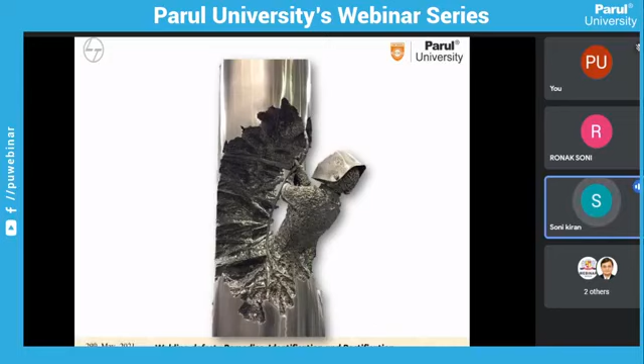There will be multiple images shown. It's okay if you haven't been able to see all the images, but these images were nothing but the creativity of welding. All the images had welding in common, and from the basic welding processes, all the creativity will be there. So it's all about imagineering. Now I'm going to share with you the imagineering, or I can say the creativity, of L&T.

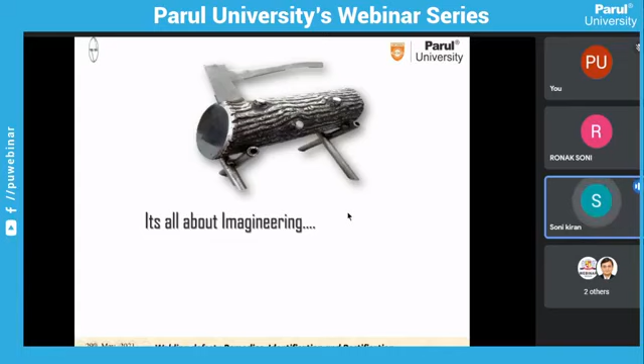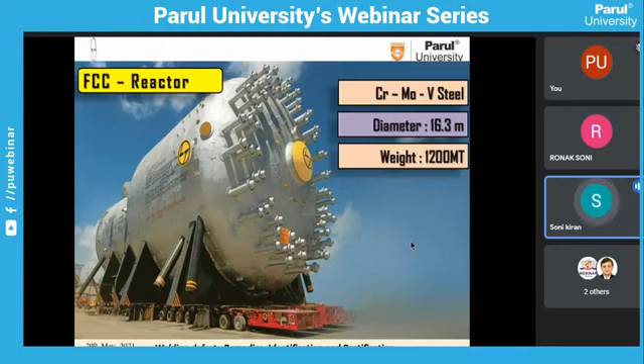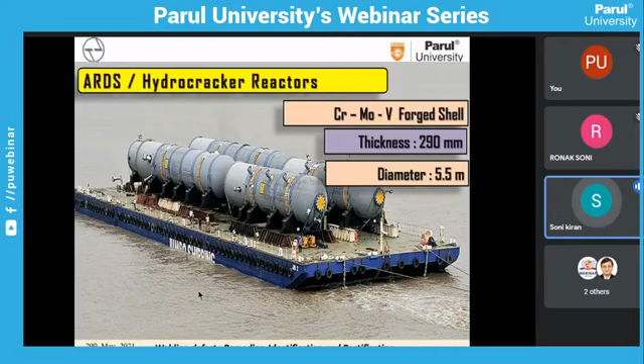Ronak, can you please move to the next slide? Just look at the creativity - the variety of material, the diameters, and the weight of what we manufacture here as equipment. Go to the next slide. Now you can see the glimpse of some images of equipment manufactured at L&T. If you look at these equipments, they are the largest, longest, biggest - superlatives in nature. So I can say, just imagine the superlative - we have actually built that superlative. This is what L&T engineering is all about.

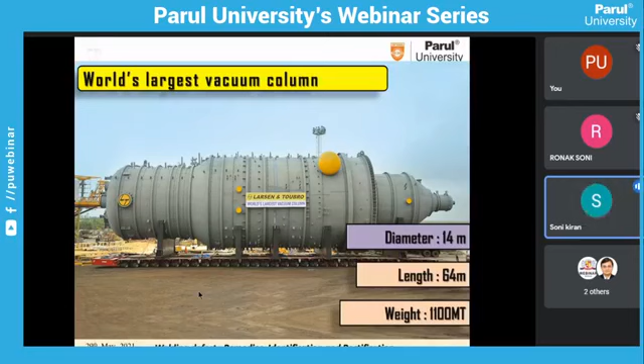Ronak, go to the next slide. You can see the glimpse of some products and the capability of L&T. This is one of the biggest, largest vacuum columns. Next slide please - you can see all the superlatives.

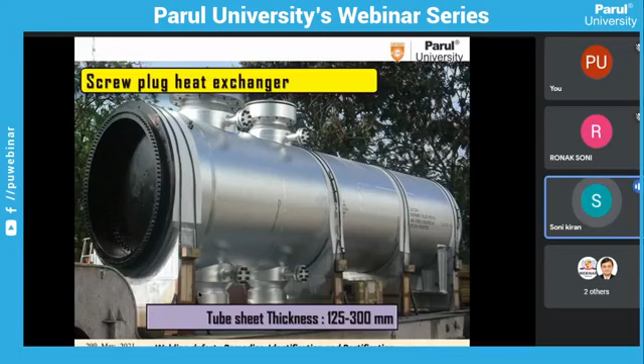The idea behind this slide is not to brand my company or L&T, but the idea is that all these equipment are not just creativity, but are also critical in nature. If there is any issue with this equipment while in service, it may cause harm to thousands of lives. From when we procure the plate material as raw material to dispatch, and when it is in service, we need to maintain the quality, or the integrity, of the material - otherwise, rather than creativity, it will damage or destroy the whole thing.

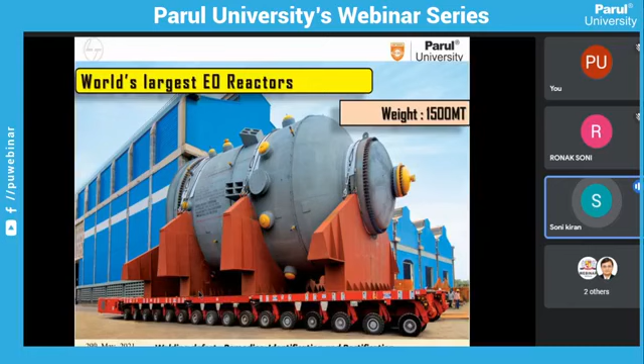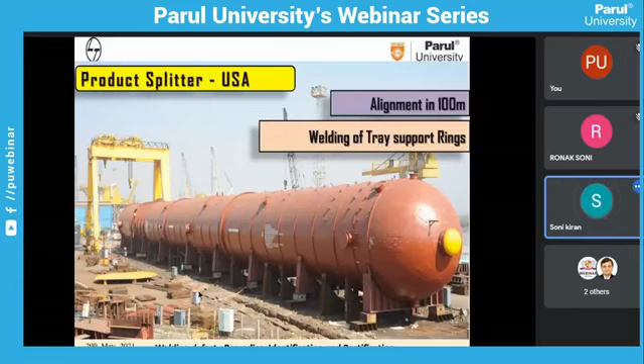Just to explain that, I have covered a few incidents in the next slides. Ronak, you can change the slide. Next slide please. These are all equipment, just to help you visualize their size and how critical they are. Next slide please.

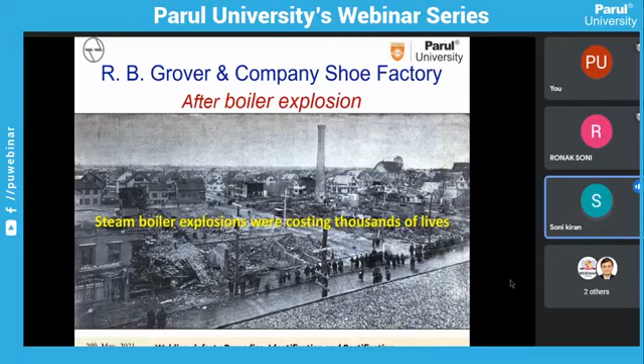So the most importance is to avoid any defect. Second, if any defect is there, we need to detect that defect. And once we detect that defect, we need to rectify it. After completion of all this cycle, the final product should be of good quality.

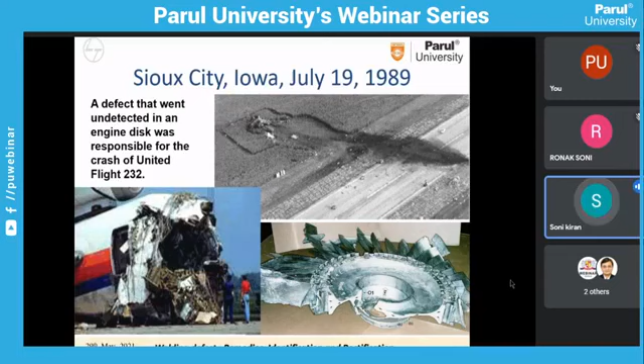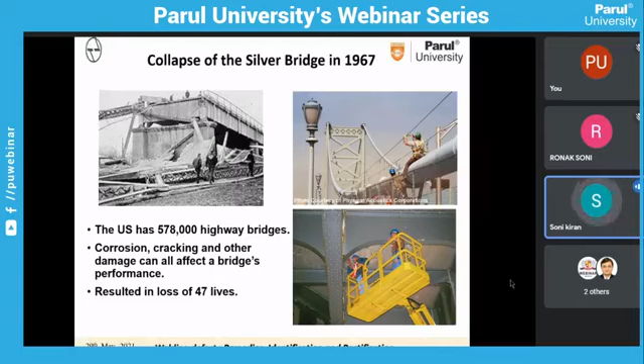Next slide please. Like it is everywhere. So as I said, we need to first avoid defect. At L&T, we have set our target like Airtel, zero defect in weld. Right now we are at 0.07% defect of the meter weld that we have welded, but we are targeting zero weld defect. Then the second stage is we need to detect that defect, and the third stage, once the defect is identified, we have to repair it, rectify it.

In a nutshell, if any customer comes to us, first of all we need to give an assurance that if we weld any product, it will be defect free. So we have to give him that assurance. Once we receive the order, we need to ensure that our product is defect free. If there is any defect, we need to rectify it. But finally, the product should be defect free.

It is not like the image you can say of the ghadi - ghadi is like 'use it first, then trust it' - but it is not like that when the matter comes to safety. It is the reverse. Next slide please.

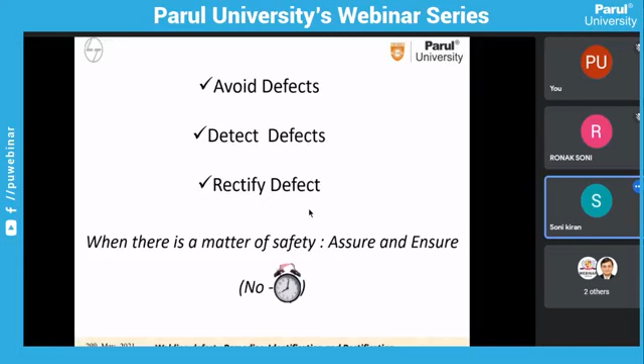Defect can be identified at various stages, like the raw material stage - if the material has an inherent defect, the fabricator cannot do anything. So first of all, defect needs to be identified at the raw material stage.

Then it comes to the fabricators like L&T, where we manufacture the product, and any defect in welding we need to identify. Once the product is delivered and during service, it is a requirement to identify defects in service also. These are all the various stages, and at all stages we need to identify that defect. Next slide please.

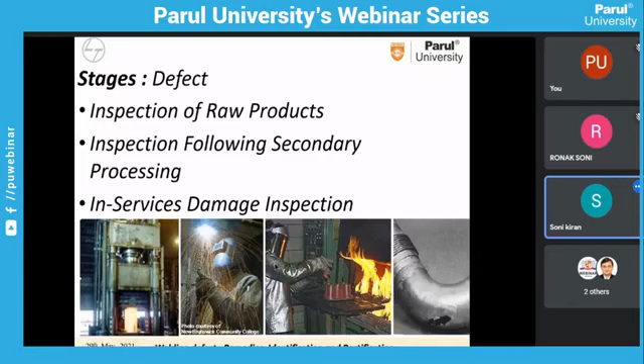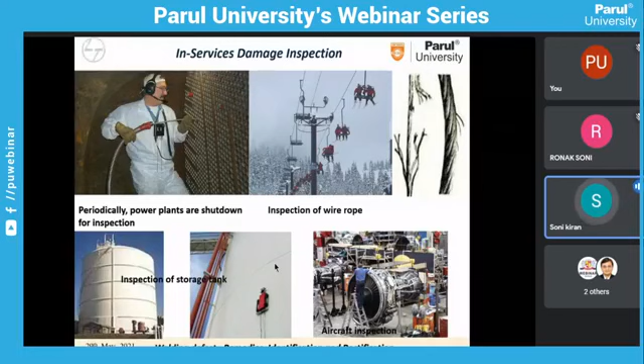Like this, in service, few examinations like we need to examine aircraft or pressure vessels. Normally refineries take a shutdown to identify the defect. This is a typical pressure vessel and heat exchanger - during welding, during fabrication, and in service, they are inspecting through various methodologies, like radiographic examination, which I'm going to cover in subsequent slides. Next slide please.

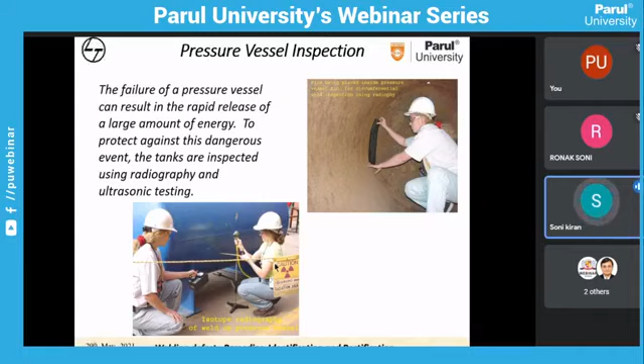So till now, I frequently used the word defect, defect, defect. But can anyone share with me what you mean by defect? If anyone would like to share their view on the word defect, what do you mean by defect?

Okay, I will explain. Please go to the next slide. We have various joining processes available with us, like bolting, riveting, adhesive bonding, brazing, soldering, and the last one is fusion, that is welding, where we actually do the metallurgical bonding of similar or dissimilar base materials. But among all the joining processes, in fabrication we use welding, that is the fusion process.

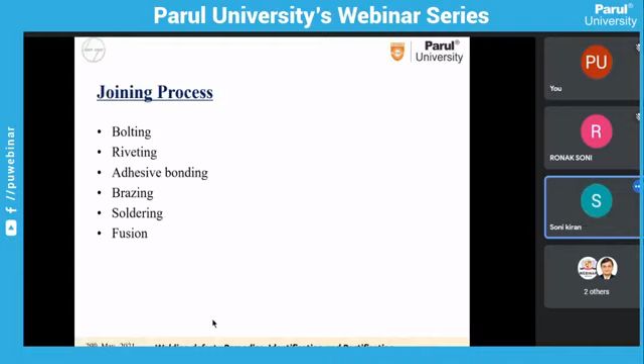Why? Because it gives us - here we can see the definition of welding. It's the typical joining process where we apply heat or pressure, with filler metal or without filler metal we can weld. But the key term in the last line is homogeneous. Among all the joining processes, only the fusion joining, if we consider this as a joint, is homogeneous.

It means the property of base material and the property of weld material, after joining, is almost matching or superior. The required property in terms of mechanical or corrosive property, the joining material and the complete joint is homogeneous, meaning uniform.

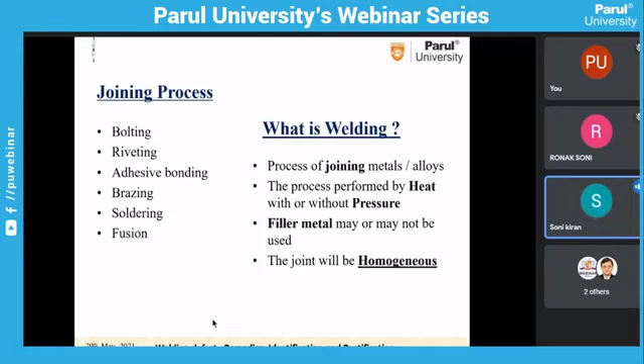If we disturb any homogeneity or uniformity of that joint, then it is considered as a discontinuity.

Discontinuity, if I want to explain in a better manner, let's say you go to get your new bought car, and today is your delivery. So what you do is when you go to the showroom and receive that car, you check all the points to see whether any defect is there or not.

You identify 10 to 12 points that are not meeting the requirement, like the steering cover where the thread is torn out. There is some observation in the car, but it will not affect the performance. But at the same time, if you look at the steering and it is loose or has some vibration, it will affect the safety or performance of the car.

So you have multiple points of observation, or in other words, discontinuities. Those discontinuities might affect your performance or might not. So I can say the acceptable observations are discontinuities. All discontinuities can be accepted or rejected.

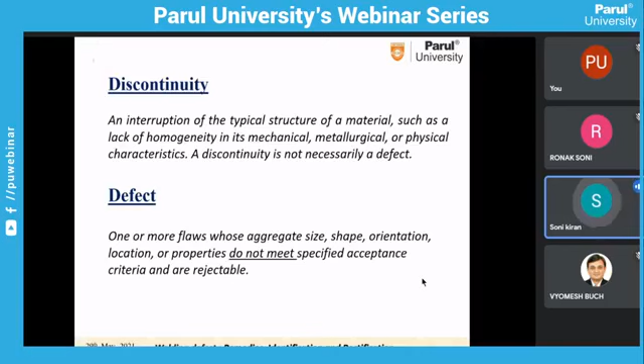So there is no need to rectify all the discontinuities. Only defects need to be rectified. All the rest of the discontinuities can be accepted because they are not defects. So there is a basic difference.

With this phenomenon, industry works with codes and standards by which we manufacture the product. So the basic idea is that you're not required to repair everything — you only need to repair and identify defects. These are the various defects. I will not cover all of them, but the basic defects that I'm going to cover, because covering all would take too much time.

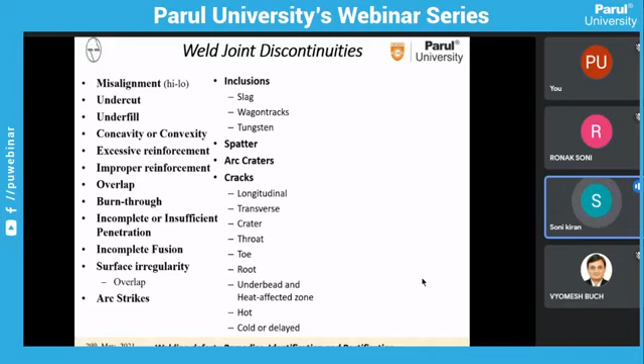There are many defects at various stages, but the majority at our fabrication level are like undercut, porosity, and burn through. I'm going to cover them one by one.

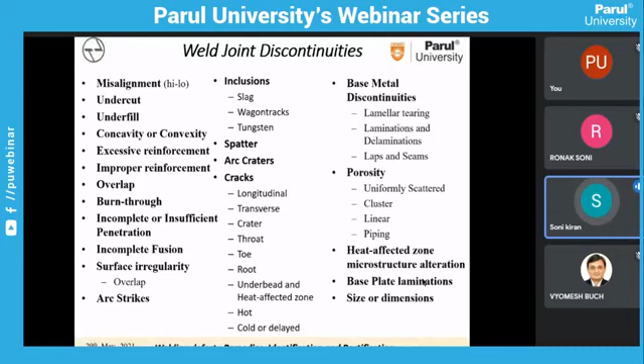A very common one, and people often say 'welding mein crack aa gaya' — the crack is a very common defect. I covered earlier why this crack occurs. There are a number of possibilities because of which cracking happens after welding.

First is the wrong consumable. If I use the wrong consumable, the weld will not match the chemistry of the base material, so it will get cracked.

There are other causes too, like not following the procedure. Normally the welding engineer gives welding procedures specifying the ampere, voltage, speed, consumable, and preheating of the job. If that technique is not followed, it may result in cracking. So we need to follow the procedure and use the correct filler wire to avoid cracking.

One more cause is improper preheating. It is required to do preheating of 150 degrees Celsius prior to welding. If I don't do that preheating, the cooling rate of the weld metal will be faster. If I do the preheat, it results in a slower cooling rate.

But if I do not do the preheating, the cooling rate of the weldment will be on the higher side, so the weld cools comparatively faster and becomes harder. Once it becomes hardened, it's prone to cracking. So because of that, the crack appears.

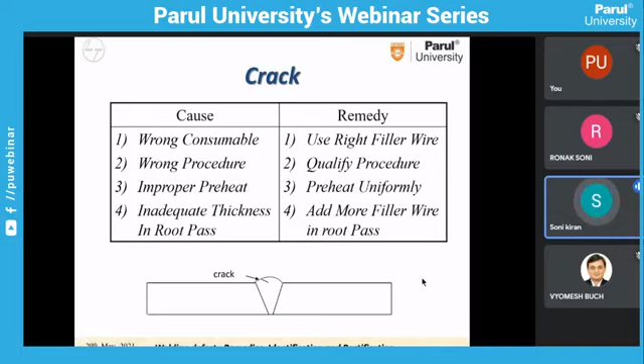Here's the image where once the weld is completed, in the heat affected zone, HAZ as we used to call it, there the crack is. It's not a visual defect. You cannot identify it by visual inspection, but there are many tools to identify that, which I'm going to cover in the subsequent slides.

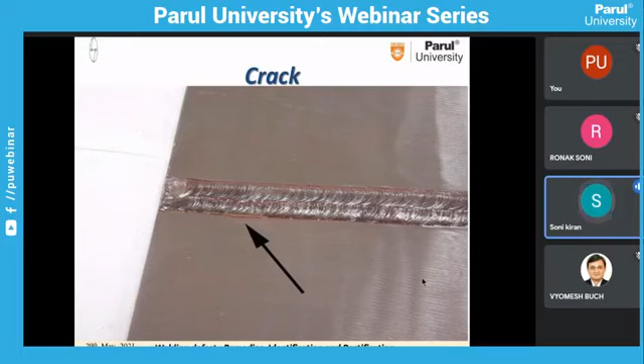Second is lack of fusion. Welding is a fusion process, and if we are not doing proper fusion, like if I'm welding with an electrode and that weld metal is not getting fused with the base metal, then it is called lack of fusion.

If the fusion is not there, it is called lack of homogeneity. So the joint is not homogeneous, and any code or any customer will not allow any lack of fusion in the joint. Our joint must be fused, weld metal and base metal must be fused, and joints must be homogeneous. So this lack of fusion has to be avoided.

There are many causes for lack of fusion. First is low ampere. A certain amount of heat is required to melt the base metal and weld metal. If the ampere is not adequate current, then it will not get fused with each other. Second thing is the electrode angle or torch angle.

If I'm not able to direct the torch or electrode in a proper manner, the edge will remain unfused. So we have to manipulate the electrode, or we can say weave the electrode properly, so that adequate weaving is there and it gets fused with each other, base metal and weld metal.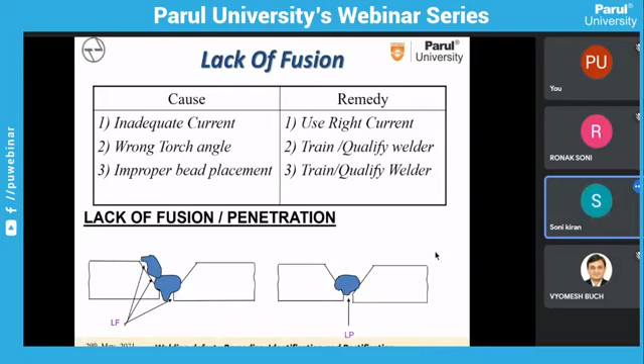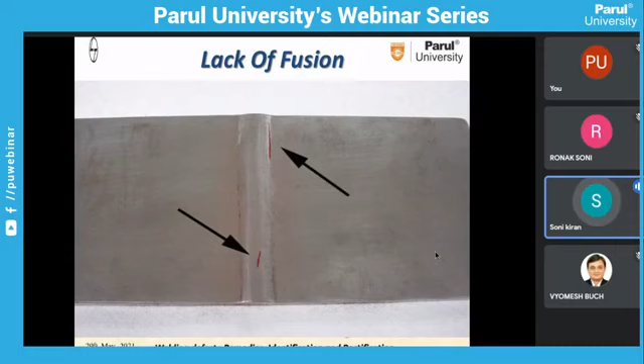This is some example of lack of fusion, like the weld bead is there, but it is not fused with the edge. These images are all from some NDT methods. You cannot see it visually, but to identify the defect there are some NDT techniques, non-destructive examination, that we will share later on.

This is porosity. Porosity is a very common defect which damages the homogeneity. Once the weld is in progress, if there is any air draft or the electrodes are in a damp condition, it will generate vapor or may damage the shielding of the arc. So that gas gets entrapped in the weld metal, resulting in porosity, and once porosity is there, the joint is not integral, and for that it has to be removed.

So the causes are improper shielding gas - like my shielding gas is proper but my torch is leaking - or my filler wire is defective, like the electrode itself having a porous material, so it will not result in a defect-free weld. So the electrode's own condition matters.

One more thing - when you weld on carbon steel that itself has rust, iron oxide, Fe2O3, if we directly weld on a rusted base metal, the iron and oxygen dissociate, and oxygen will entrap into the weld metal and create porosity. So we need to clean the base material frequently, mainly just prior to depositing the weld bead.

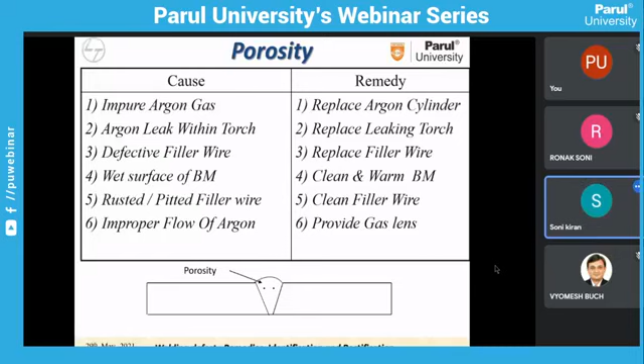One more defect is slag. So let's see this image of the SMAW process. Here in SMAW, there is a typical electrode with a bare wire covered with flux coating. That flux serves two purposes: it stabilizes the arc and prevents contamination of the arc from the atmosphere.

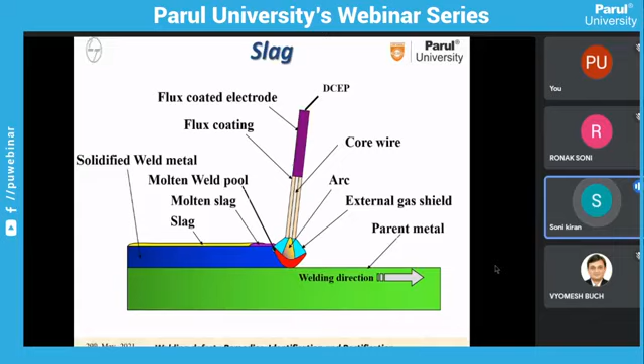In the SMAW process, the weld metal is deposited, and above that the flux converts into slag, because it is not weld metal. That slag needs to be removed. If we do not remove the slag before depositing the second pass, that slag will entrap, and since it is not a metallic material, it damages the homogeneity, so it is considered a defect. The cause is first inadequate cleaning.

The second cause is the current or angle. If we are not in a proper angle, it also results in entrapment of the slag. So the remedy is we first need to clean the weld metal prior to deposition of the second layer, and sensitize the welders so they can deposit good quality weld. These are the remedies.

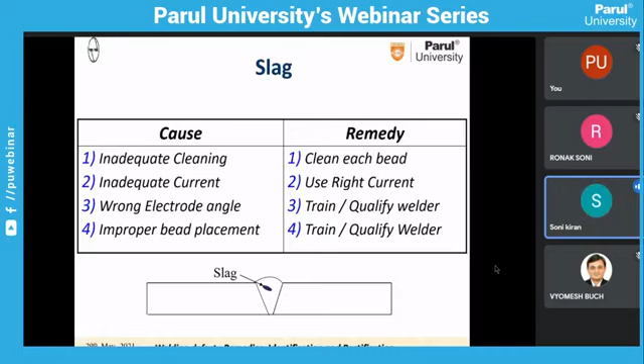Undercut is nothing but, if we weld with higher current, it fuses with the base metal because of the higher ampere, but it can also damage the surface of the base metal at the toe of the weld, cutting the base metal. Once it cuts the base metal, the total thickness of that section is reduced. Like if my base metal is 10 mm and my undercut is 1 mm, then my resultant joint thickness is 9 mm. So it actually reduces the design thickness.

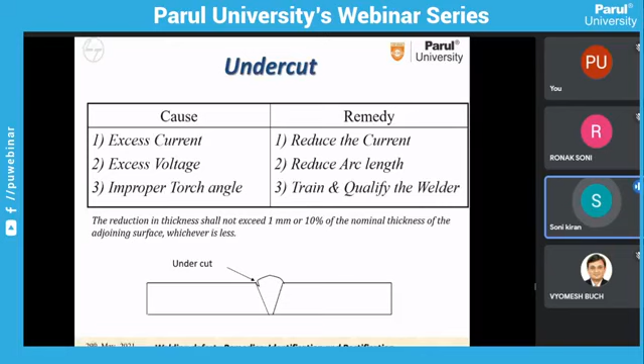That's why this undercut is not permitted. Small undercut will always be there because of welding, but excessive undercut is not allowed. There is some criteria, like 1 mm or 10% of nominal thickness is allowed, whichever is minimum, but more than that is not allowed. So that is the discontinuity and defect boundary line. The cause is excessive current or voltage, and we need to prevent it by lowering the ampere.

Next is lack of penetration. The penetration is actually at the root side, and since the process is fusion, we have to fuse the base metal from top to root, the complete thickness has to be fused. If any fusion is not there, it is called lack of fusion. But if the same lack of fusion is at the root, if you see the image, at the root the edges are not fused.

So in other words, it is called root not fused, or penetration not there. That is called lack of penetration, and lack of penetration is not allowed because complete fusion is not there. There are many reasons, but the main reason is the welder does not have a sufficient root gap. The gap is not sufficient between the two plates, so he is unable to deposit the weld up to the root. The second thing is the root face.

The root face is so high that the energy is not sufficient to penetrate the base material. So these two are the basic reasons, or one more thing is about the direction of the arc. If the arc direction is not proper, he cannot deposit till the root. So the main idea is the welder has to reach up to the root and fuse that root line. If it is not done, then it is lack of penetration.

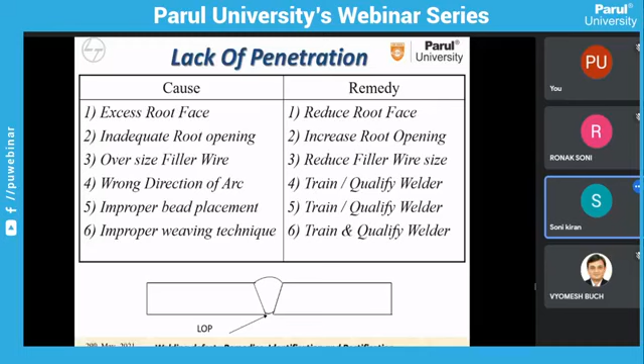Here the welder's skill has to be upgraded, along with proper joint configuration, by which we can avoid this defect.

Next is excess penetration, which is opposite of lack of penetration. Here, because of a higher root gap, the weld metal deposited by the welder actually penetrates excessively on the root side. This is actually a defect, but it can be avoided. If excess penetration is there, we can grind it from the back side, so this defect can be corrected.

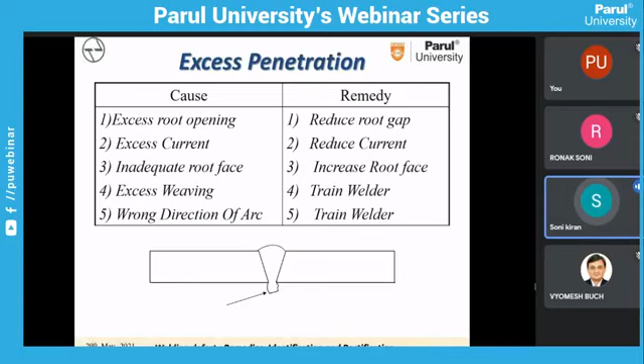But this is not possible every time. Like if my pipe is 1 inch and I find excess penetration in the joint, grinding that joint from the root side is not feasible because of accessibility. At that time, excess penetration is considered a defect. If you are able to grind it, then it is not considered a defect.

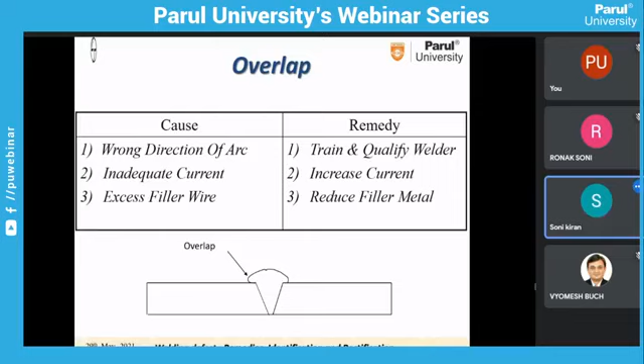Overlap, or another word, is fold. Weld metal is there, but once you deposit a weld metal, that weld metal actually overlaps on the base metal more. That creates a sharp edge at the toe, and that is considered a defect because it creates stress risers. Once it acts as a stress riser, the possibility of defect formation from the toe is very high. So that's why it is called a defect.

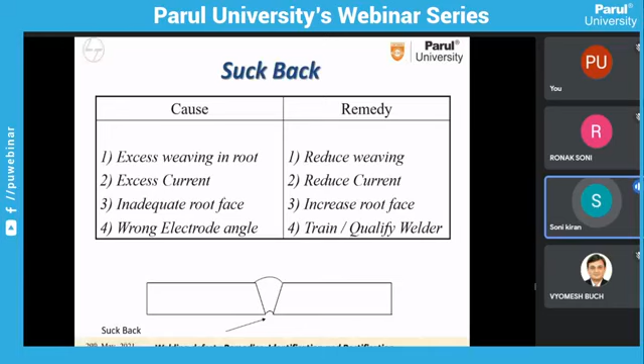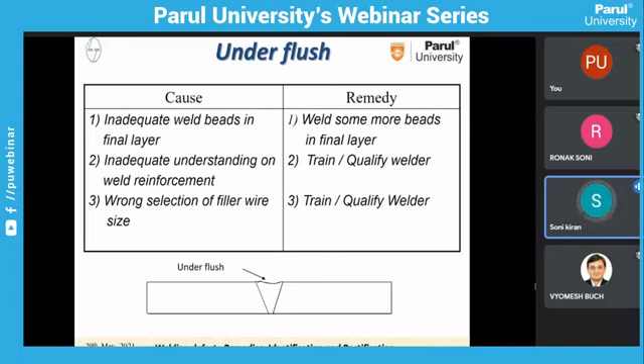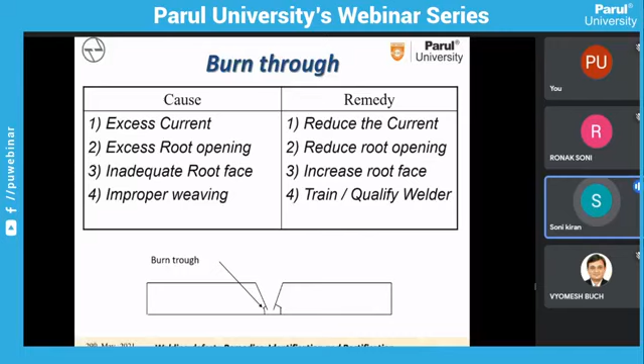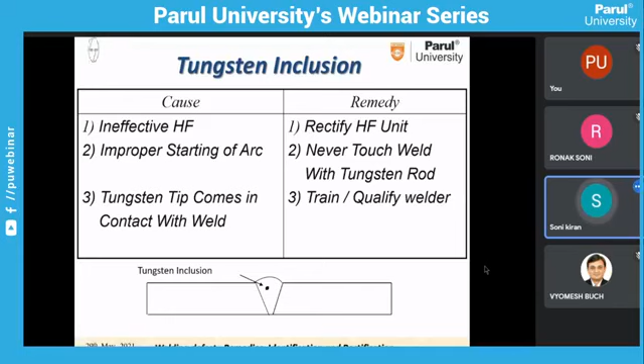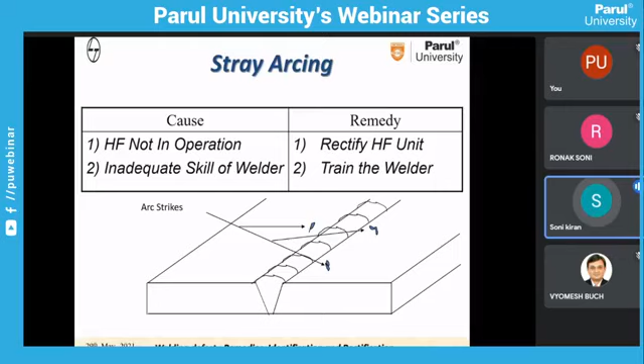The second issue is stray arcing and spatter. When we weld, there are a number of spatters. Instead of the weld depositing in the groove, some weld particles, because of excessive current, deposit on the base metal, which creates an aesthetic issue. The spatter needs to be removed, and it also damages the metallurgical properties, so this needs to be avoided.

For fillet joints specifically, there are a few terminologies, like concavity. If we require a certain fillet size and over-deposit the weld metal, then it is called convexity.

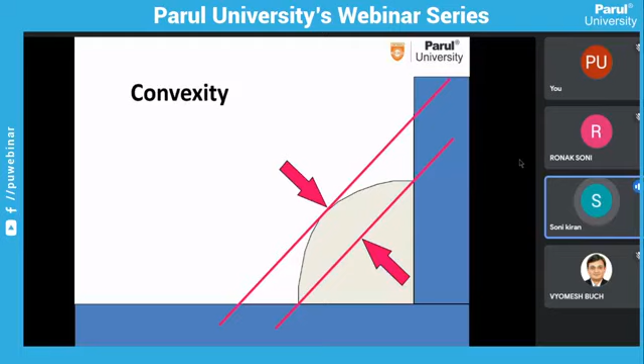If we deposit lesser weld metal, meaning the leg length is met but the throat is less, then it is called concavity. Ideally it should be a perfect triangle to achieve the desired throat, but these are two defects we can find in a fillet weld: concavity and convexity.

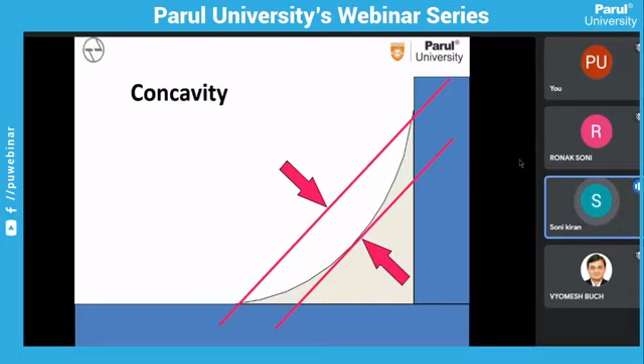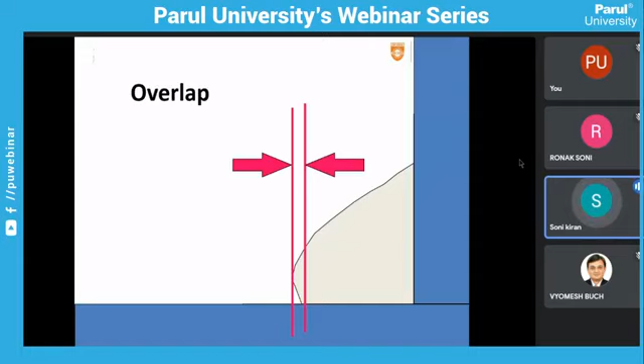Next, in a fillet weld, because of gravity, if I weld the horizontal plane of the base metal, the weld metal flows and overlaps on the base material. This is similar to overlap in a butt joint, but it creates a stress riser point.

So these are all defects, but why are they defects? Because they are unacceptable. Acceptable limits are given in some codes, standard guidelines like lack of fusion or crack, which are totally not allowed. This is for the radiography requirement - for example, up to 6 mm length discontinuity is allowed for 19 mm thickness. If my discontinuity is 7 mm, then it is considered a defect.

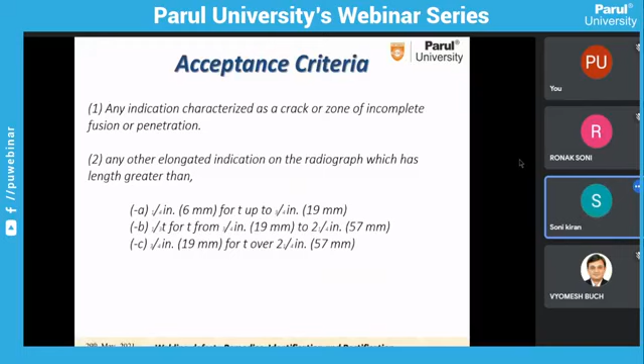So it depends on the thickness. For up to 57 mm thickness, 19 mm discontinuity is allowed as maximum, and above 57 mm, more than 19 mm is not allowed. These are the general acceptance criteria.

Now our second stage is to detect the defect. First we identify how to avoid it, but due to the manufacturing process you will face many defects. Now we have to identify whether a defect is there or not. So the very first tool to identify the defect is non-destructive examination - without damaging the job, we have to inspect it. If we want to damage the job to identify a defect, that is not a solution, because finally we need to produce the product; we cannot damage it. So we need to inspect the product without damaging it.

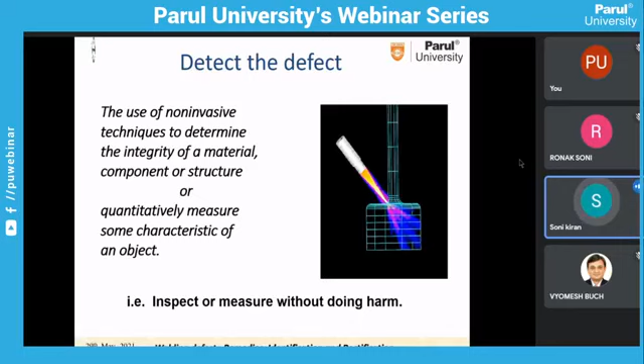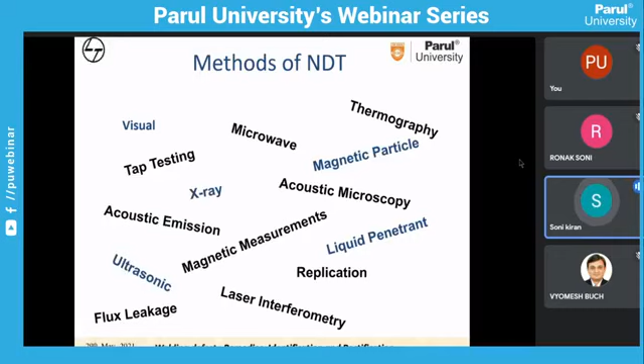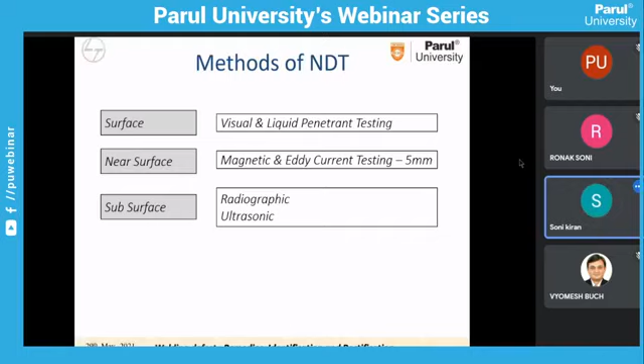The examination we use is non-destructive examination, and the very first one is visual. Many techniques are there, but visual is first. The welder or supervisor has to see the joint visually. Few defects which are open to the surface can be seen visually, and few defects which are subsurface, near the surface, can also be identified. But we cannot see subsurface defects visually because the job is not transparent. So for that we have to do NDE like radiography and ultrasonic. I will share one slide for each NDE technique.

The very first technique is liquid penetrant. If my defect is not visible to me, but the defect is already there, I am not able to see it visually.

The next step is to remove that dye and apply one more chemical which comes in white color, called the developer.

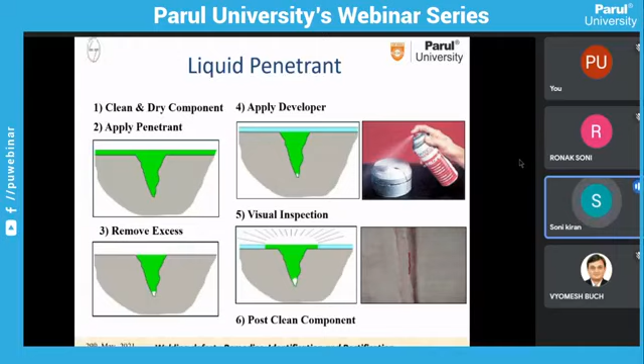So this is liquid penetrant testing, very commonly used in industries.

Second is open to surface or subsurface defect. To identify that, there is one technique called magnetic particle test. Here we use a magnet, the principle of magnetism, so the material must be magnetic. For that, carbon steel or low alloy steel can be used, but stainless steel cannot use this technique.

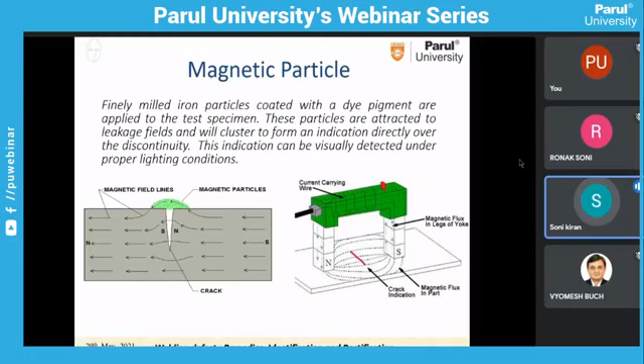If the defect is not open to surface or subsurface, we have to do volumetric examination. Like in general medical terms, we do X-rays of the chest and other parts, in the same manner we can do X-ray, or in more technical terms, radiography, of the particular product. The principle is the same as medical language, but here the kilovolt energy is higher than that required for humans.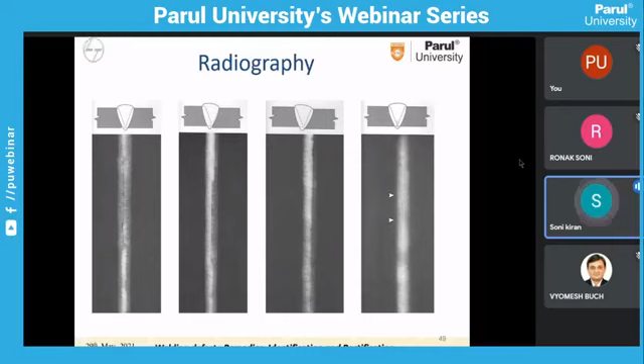If we apply a current, that transducer generates vibrations, or we can say it generates the ultrasounds. That ultrasound we have to pass through the base material.

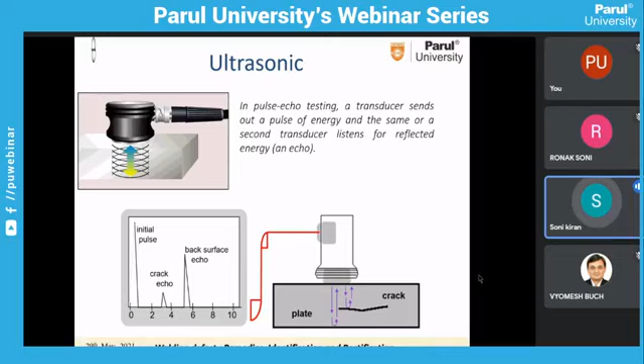This is how we can identify the depth of the defect, and by the skill of the operator, he can also judge the morphology of the defect, whether it's cracks or slag. He can identify the indication along with the depth.

So for all defects, first of all we have to avoid defects. Second, we need to detect the defect. Once we have detected the defect, the last option is to rectify it. So to generate a quality, defect-free product, there are certain standard practices we have to follow.

First of all, for any defect, in L&T we used to make a procedure, and that procedure we give to the operator on how to rectify the defect. The standard procedure is like this: here a horizontal seam is there, and in the center there is a defect that we have identified.

Now with radiograph or UT, once we get the tracing - tracing is nothing but like a butter paper in which we mark everything - with that butter paper we mark the defect location on the actual job.

Now before doing any grinding or further rectification, we have to mark reference lines to identify whether the defect is gone or not after grinding. So for that, we mark a defect reference line like 50mm on the two sides and 100mm sideways. With that reference, after grinding, we check whether the groove is at the proper location and proper depth.

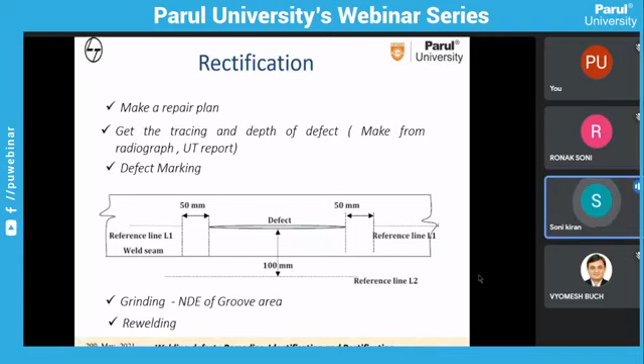So this is how we have covered everything for defects: avoiding defect, detecting defect, and rectification of defect. Now you can ask if you have any queries.

I'm happy to share on your queries. This is actually the slide I used to share at the last. If I'm unable to answer your question, don't worry, I will answer based on my knowledge.

To cover everything in one hour is always very difficult for me, and to grasp everything in one hour is also difficult for you. So if any queries pertaining to industrial practice, or related to defects, identification, or how to rectify defects, you can contact me at any point of time. Right now, if you do not have any query, don't worry. I will leave my details in subsequent slides, and you can approach me at any point of time.

If anyone has any query, I will definitely forward it to your email ID, and you may respond to that query if anyone has any doubt. I would like to thank you, Mr. Kiran sir, for your valuable time giving this webinar on welding defects and its identification. Thank you very much, sir. Thank you, Ronak, and I'm sorry for the initial delays because of my connectivity issue. Thanks to Parul for providing me this opportunity. Thank you, sir.